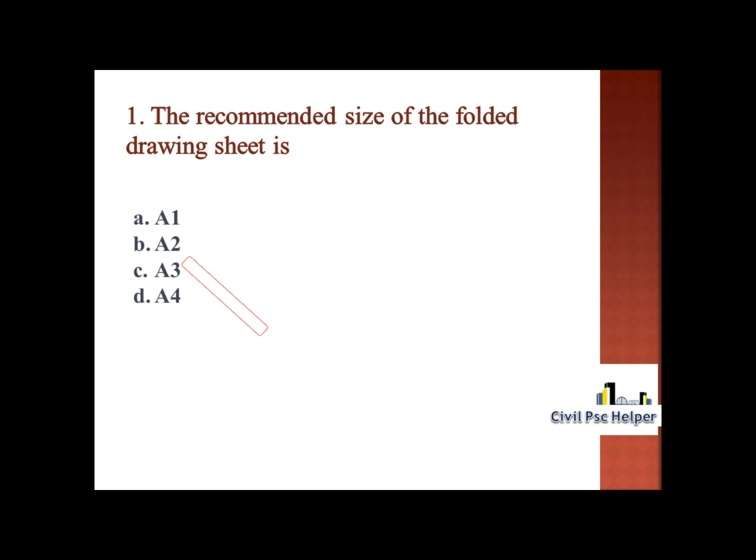Third question. 1 acre is dash meter square. Option A 8027, option B 2047, option C 4047, option D 1222. So 1 acre is 4047 meters square. Option C is correct.

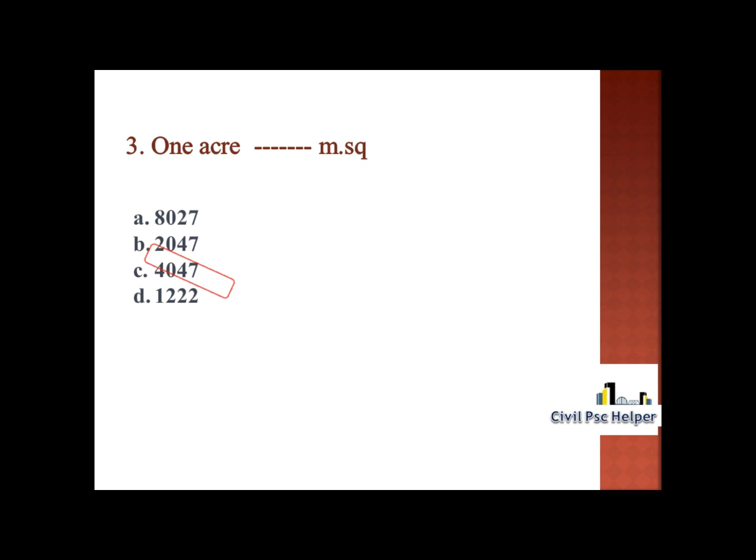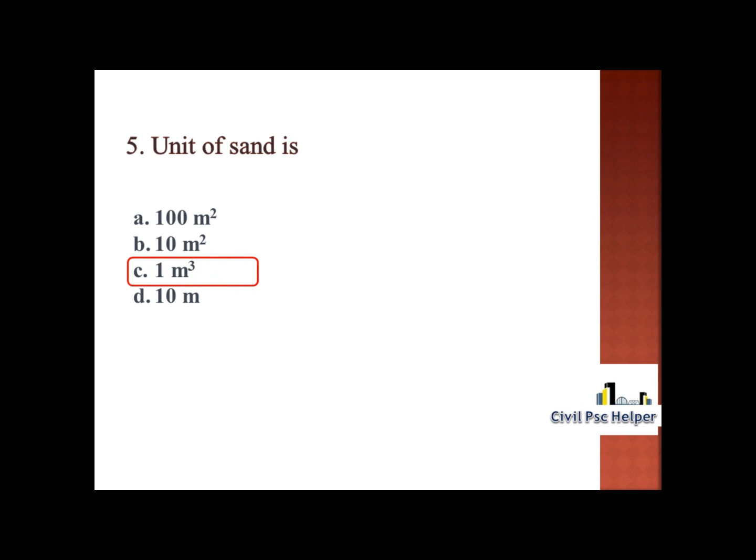Fifth question. Unit of sand is option A 100 meters square, option B 10 meters square, option C 1 meter cube, option D 10 meter. So the unit of sand is 1 meter cube. Option C is correct.

Sixth question. Measurement unit of plastering is option A meter square, option B meter, option C meter cube, option D meter raised to 4. The measurement unit of plastering is meter square. Option A is correct.

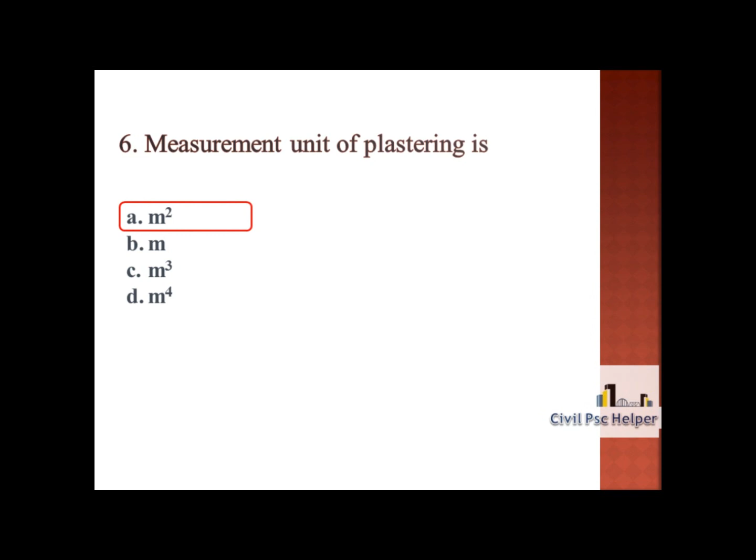Ninth question. The roof provided for veranda is option A hip roof, option B gable roof, option C lean-to roof, option D deck roof. So the roof provided for veranda is lean-to roof. Option C is correct.

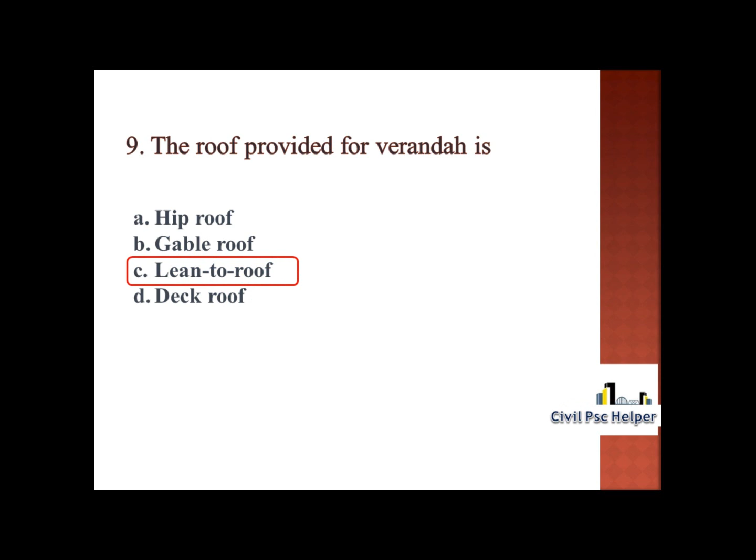10th question. The outermost compression member of a truss is known as option A purlin, option B strut, option C common rafter, option D principal rafter. So the outermost compression member of a truss is known as principal rafter. Option D is correct.

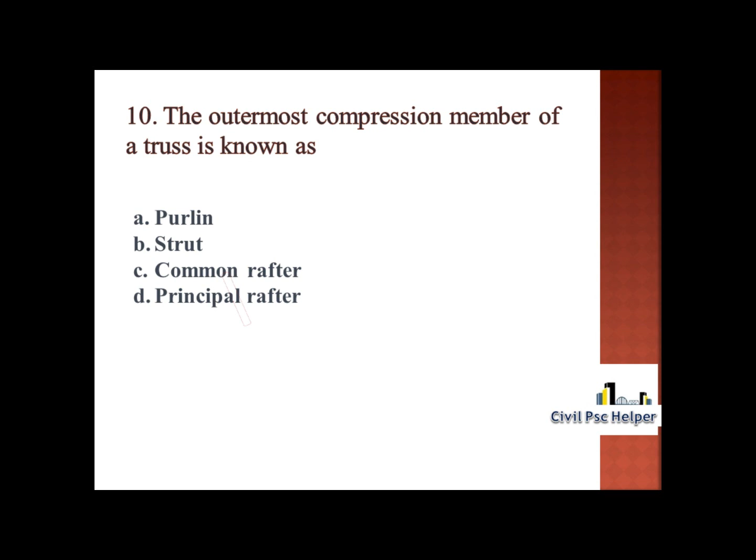12th question. 3-point problem can be solved by option A Lehman's method, option B Bessel's method, option C mechanical method, option D all of these. So the 3-point problem can be solved by all of these methods, that is Lehman's method, Bessel's method and mechanical method can be used to solve 3-point problem. Here option D is correct.

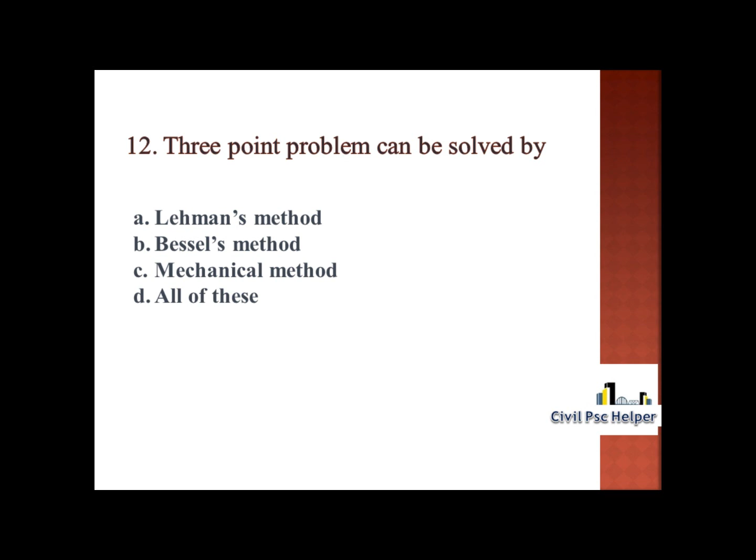17th question. The inner part of wood surrounding the pith is called option A heartwood, option B cambium layer, option C sapwood, option D outer bark. The inner part of the wood surrounding the pith is called heartwood. Option A is correct.